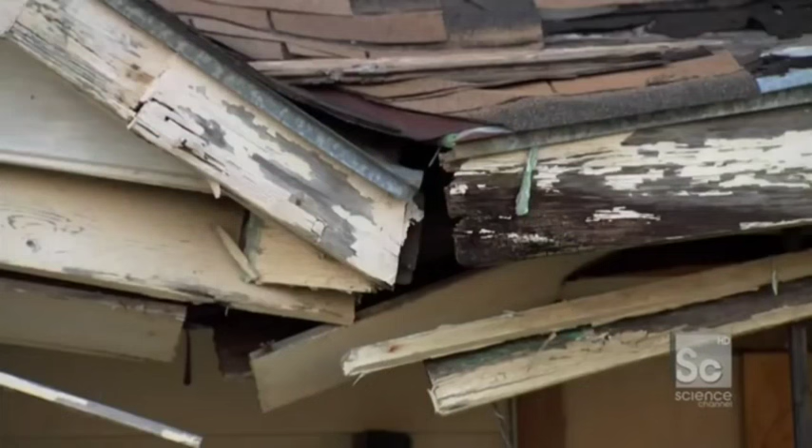It's been almost 5 years since Hurricane Katrina made landfall, and New Orleans is far from having recovered. Hurricane Katrina displaced more than 1 million residents, and since the event, less than half of New Orleans' population has come back. More than 80,000 homes remain unoccupied. The people of New Orleans are still living with the constant threat of another major storm. So this is still a city very much in crisis.

But New Orleans has a plan to ensure the city's safety for years to come and give people the confidence to come home. The federal government, the Army Corps of Engineers, and thousands of Americans are coming together to try and save this city. They're rebuilding New Orleans with hundreds of state-of-the-art, hurricane-resistant homes and a radical $14 billion storm protection system.

Prior to Katrina, this wall was the only line of defense that those residents had. It was the primary line of defense for hurricane storm surge. Tell me what's different now. What's different now is we've taken a step back and looked at the larger New Orleans area, and we've actually moved the primary hurricane defenses from this location to areas 8 miles away.

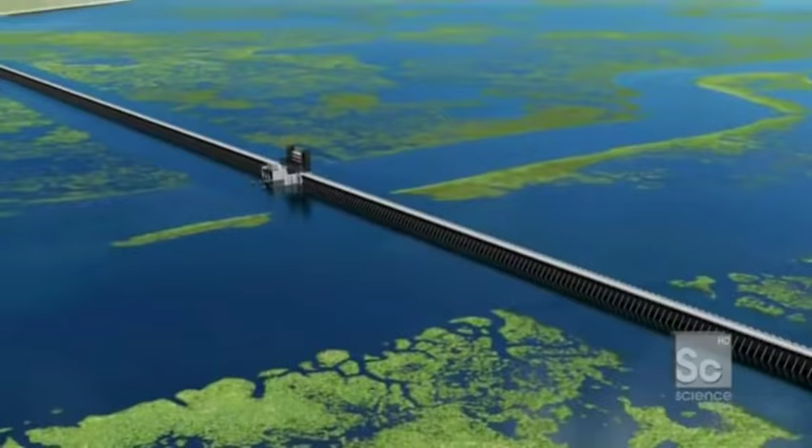8 miles from downtown New Orleans, they're building this: a 2-mile-long, over 150-foot-deep flood wall that is fundamentally changing how New Orleans will fight hurricanes. It's unlike anything ever built. The largest surge barrier in the world. Nicknamed the Great Wall of Louisiana. Designed to hold back over 44 million gallons of water from an oncoming storm.

Prior to Hurricane Katrina, stormwater flowed into New Orleans and was met by a 350-mile network of earthen embankments called levees. Located just 100 feet from people's homes, they held back the water, keeping the city dry. But when Katrina hit, the system was so overwhelmed by water, the levees broke in 50 places, flooding 80% of the city in just 5 hours' time.

To avoid this disaster happening again, the surge barrier is being built miles away from downtown New Orleans, where it can stop the water before it enters the city.

Instead of waiting for the storm to come to them, for the first time, they are taking the fight to the storm. Is this a new way to think about battling hurricanes? Nowhere in the world have we built a wall trying to keep out 25, 26 feet of water. No one's ever done it before. And this height here on a storm surge is unique. You gotta remember, the hurricanes that come to New Orleans are bigger, meaner, and there are more of them.

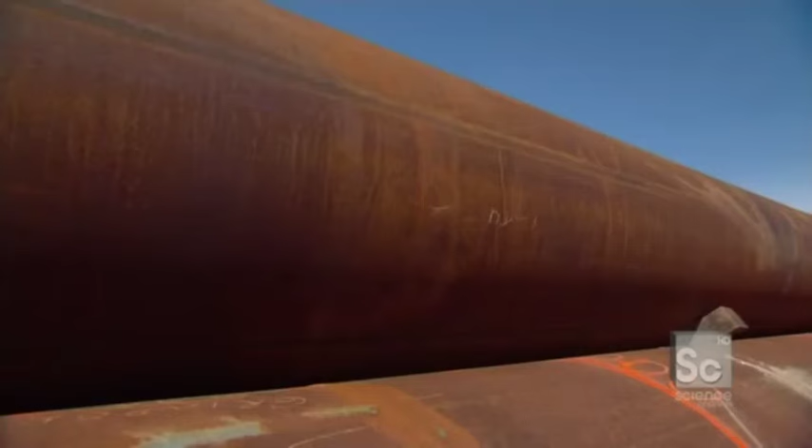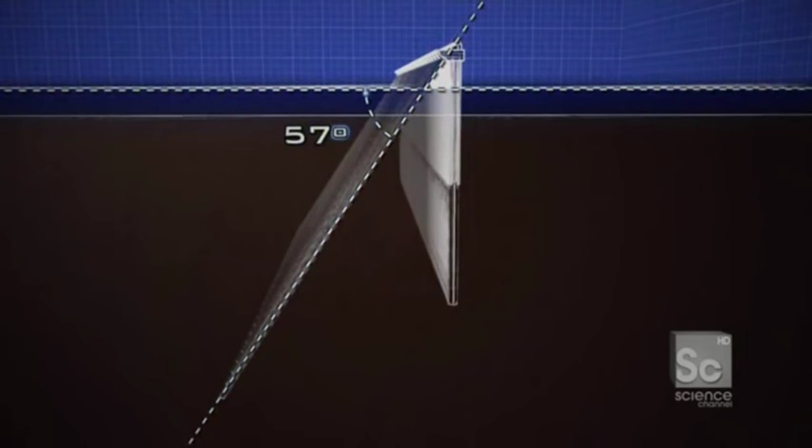To hold back a 26-foot wall of water, the barrier is fortified by 628 batter piles. When the storm surge hits the wall, what pushes back and keeps that wall upright and strong are these guys right here. They're called batter piles, and they're basically 288-foot-long steel tubes inserted into the back of the wall that support it and transfer all the loads of that storm surge into the foundation. Since there's no bedrock to hold the pile in place, over 80% of the wall is actually below the mudline. The deeper the pile is driven, the more friction there is to hold it in place. Each pile is almost as long as a football field and placed at an acute angle for added stability.

What'll be interesting about this lift is that this pile right here is horizontal, right? But in the end, we have to get this thing at a 57-degree angle to feed it into the machine called the leads. No one has ever attempted to drive piles this size at an angle before.

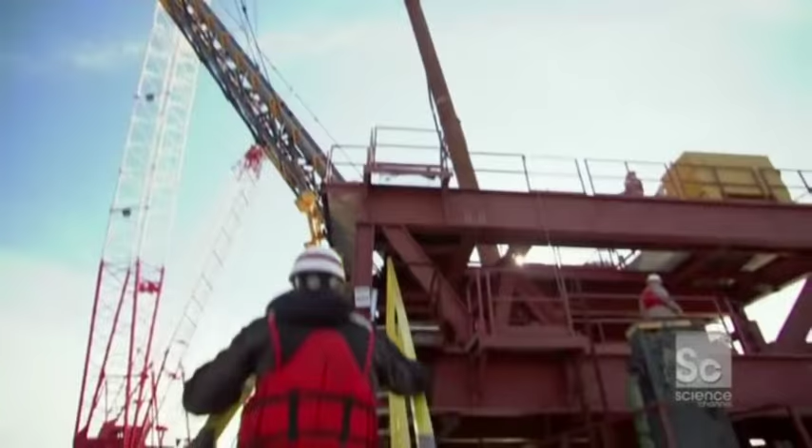To accomplish this engineering first, the Army Corps invented a massive 1,000-ton machine called the leads. Unlike traditional pile drivers that can only hammer vertically, the leads can hammer the piles at a precise 57-degree angle. And with 4 chutes, they can drive 4 piles in a row before moving on, saving almost 5 months of construction time.

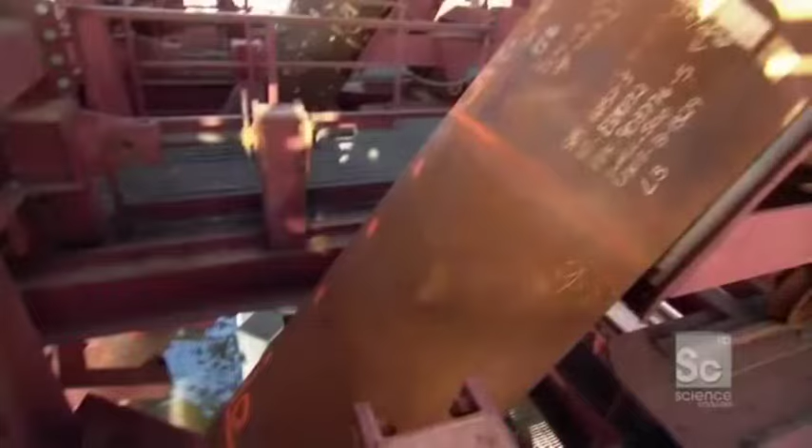So here it is, lowering it through the leads, right? The thing that's leading it right down this 57-degree angle, getting into position so we can start knocking this straight into the ground. Even the leads isn't big enough to handle a 300-foot-long pile in one go. So they're driven in 2 sections. The first section is 158 feet long and weighs more than 13 tons.

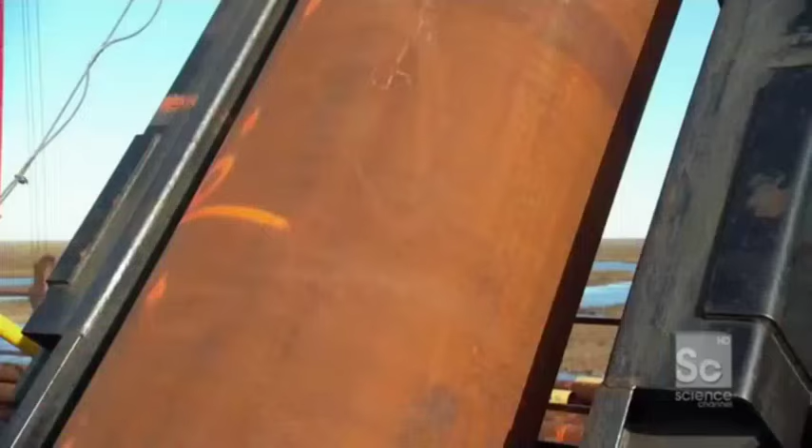So Mike, as I'm looking at this slowly creep down into the earth, this is just sliding into the soil below, right? Into the mud, yeah. I mean, there's really nothing down there, huh? Not much. I mean, it's soft. It's so soft that the pile sinks 38 feet in a matter of seconds under its own weight. After that, the friction from the mud becomes too great, so they have to use a hydraulic hammer. You want to run that hammer down? Absolutely. Time to drive the hammer.

So it's your job to control how much force this thing hits it, when it hits it, and how you drive the pile down. That's it.

So before the sun sets today, we're going to start smacking this thing and send it in? Right now, the next 2 minutes. If everybody's ready, got the earplugs on, let's go. Let's do it. I got earplugs. Come on, let's start smacking it. It's on auto.

So every time that smacks the pile, that pile gets pushed a little deeper into the ground. During the first 158 feet of driving, each blow moves the pile 10 inches. But as the pile goes deeper and friction increases, it takes 40 blows to move the pile that same distance.

So, Mike, the first piece is now in place. Right, and now they're going to bring over the second piece, which is that one right there.

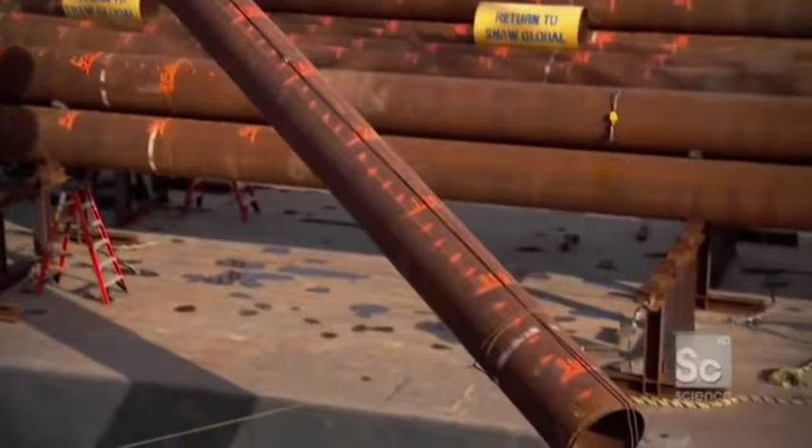Loading like a rocket launcher almost. They have to get the piece in, tamp it down, and line one end up with the next. Line it up, line it up! All right, so here it is, it's coming down. You can see we're basically going to fit this piece into that piece, have a little bit of an overlap, and that's what they're going to weld together.

So if you look right there, you can see the weld's been completed. Those two separate pieces have now been spliced into one, and now that pile is 245 feet long. The weld looks good. Yes, sir.

We're ready to drive it, put it on the ground. This is the last time we're going to see this pile in the air. So let's flip the hammer on and start smacking. Smacking it, are you ready? Yes, I'm ready, whenever you're ready. I'm ready. I was born to smack pile.

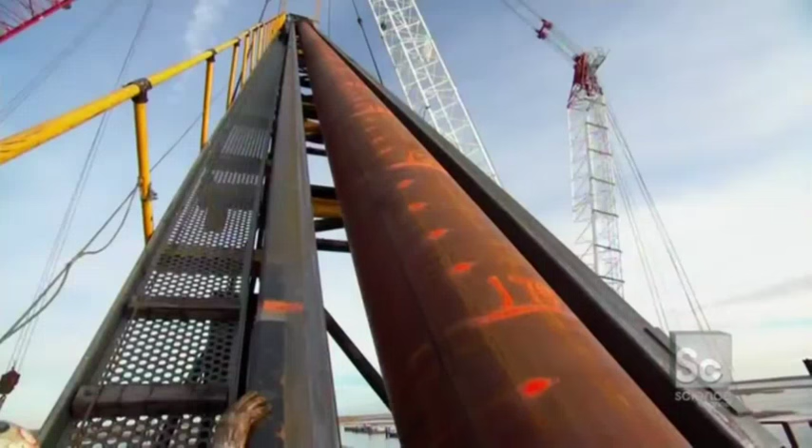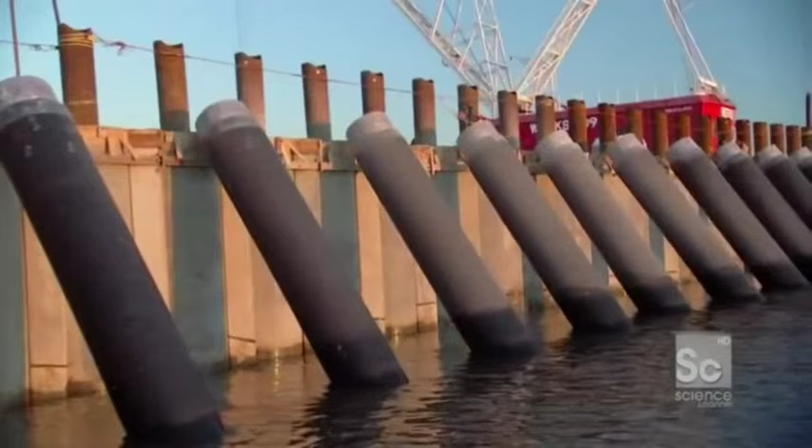It takes around 1,200 blows to get one batter pile into place. To stay on schedule, they need to install 628 of them in just 6 months, a total of about 750,000 blows. Normally, a project of this magnitude would take more than 17 years to complete. To make New Orleans safe as quickly as possible, the Army Corps is attempting to finish the surge barrier in just 3. To pull off this incredible feat, this crew has to work through hurricane season.

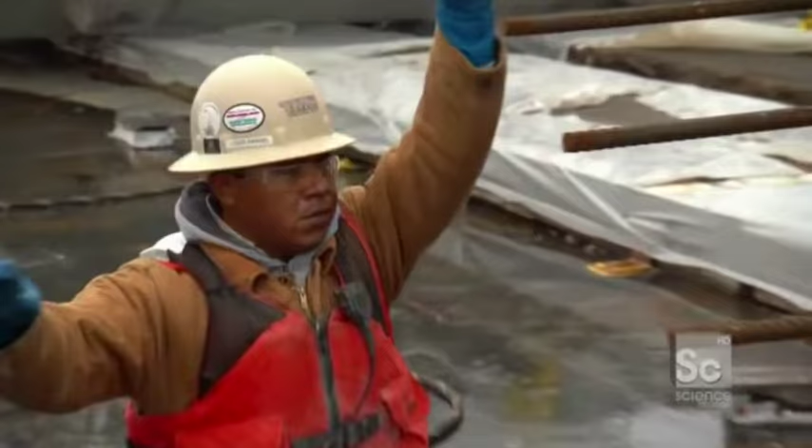So engineers came up with an innovative solution to get the job done right and done fast, even in rough waters. One of the biggest challenges when you're working in the middle of a lake is having a level surface on which to work, because barges move and tugboats pitch and roll as well. So in order to have a flat surface to accurately work, they developed that system right there called a trestle. It's a semi-permanent track that moves along with the wall construction. A trestle is basically a huge railroad track anchored into the lake bed, providing a stable workplace for large machinery.

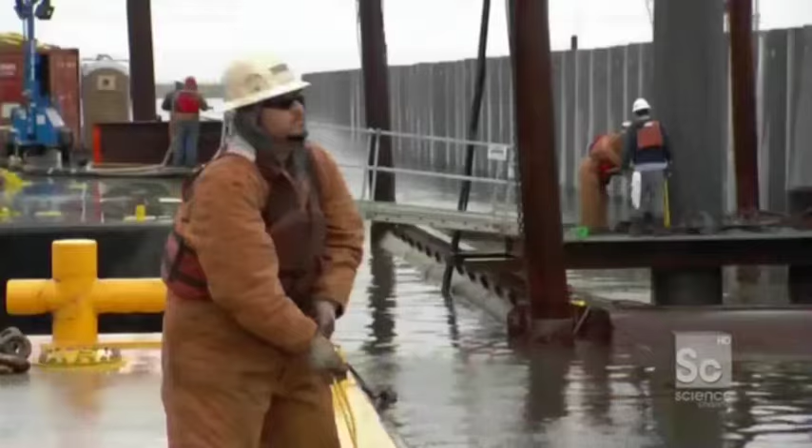The project has 1,000 feet of track for the entire 10,000-foot-long wall. So to keep construction moving forward, the trestle team has to leapfrog 50-foot sections from one end of the site to the other, up to 6 times a day. 50 feet of trestle track's about to go from this barge up in the air and extend our construction platform another 50 feet. Each trestle segment has to be aligned seamlessly with the existing track. The gap can be no more than 3 millimeters, or about the thickness of a shoelace.

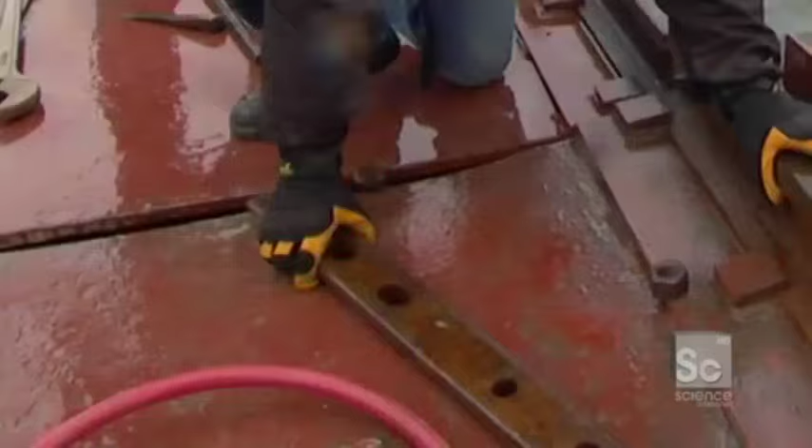Okay, so now that we have the trestle track, generally speaking, in place between the two beams, let's walk on the trestle. I'm standing on the pre-existing trestle track, and this right here is the new piece of track. As you can see, we have a big gap. We'll use this plate right here to put it on either side of the track, put the bolts in, and bind the track together.

6 bolts need to be in place to ensure a solid connection between the trestles. The issue is we have 5 out of the 6 bolts lined up, but one side is slightly higher than the other, so we're having a problem getting in the final bolt. The holes are about 3 millimeters off. In order to make that space to get it through, we're going to torch it out.

Would it not have made sense for me to move before he started? On the plus side, it's really cold and rainy. My right hand is much warmer than it was a minute ago.

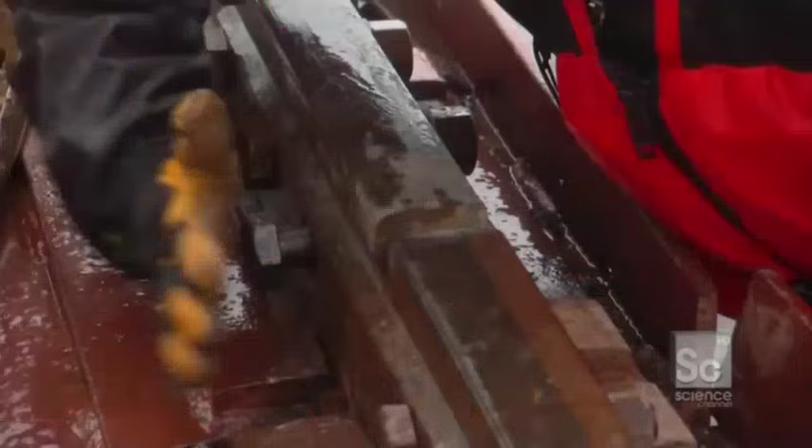After cutting, torching, and hitting, and some emotional consternation, the 6th and final bolt is through. This track has now been extended 50 more feet, and the construction site will extend. Can we go home? We finished now?

Up next, building new lives and new hope in the 9th Ward, with houses designed to fight back against the worst Mother Nature has to offer. These houses are being built to survive another Katrina.

When you think about what took place in New Orleans, you of course think about Hurricane Katrina. But the truth is, the actual damage wasn't from the hurricane, but rather from what it created, something called a storm surge. A storm surge is a wall of water pushed out in front of a hurricane by high winds and low pressure. During Katrina, it caused waters to rise more than 20 feet, overwhelming the existing hurricane protection and flooding almost the entire city. Katrina's storm surge was responsible for 90% of the destruction in New Orleans.

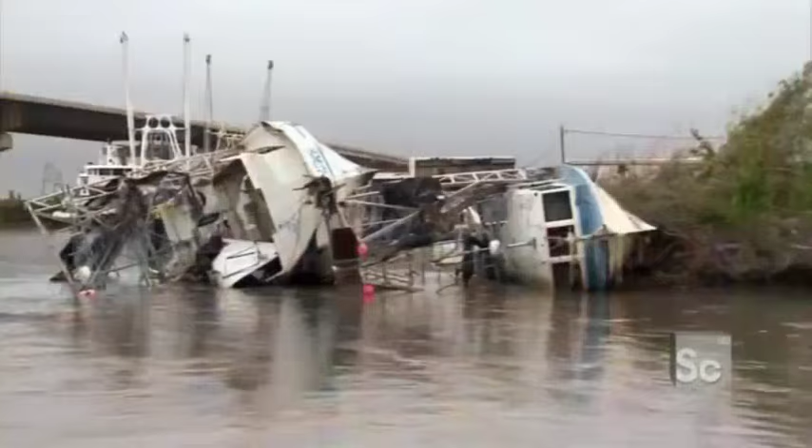Hardest hit was one of New Orleans' poorest neighborhoods, the lower Ninth Ward. I was actually here filming 5 years ago, right after the event, and it was harrowing. There were houses that were just blown clear off their foundations. Others were torn in two. I saw a house that was actually sitting in a tree. 5,000 homes were lost in this neighborhood alone, and less than 20% of its residents have come home to rebuild.

Hello? Hi, Miss Leggett? Yes. I'm Danny. Hi, pleased to meet you. Can I come in? Sure, I'm just about to get started on some sweet potato pies.

My timing was fantastic. Tell me what you saw when you first came back. You came here and you looked at it and you saw nothing. There was nothing here. A porch that my daddy built twice. That was it. And the tree.

Everything was gone. After all you went through, what made you want to come back to rebuild? I didn't ever want to leave in the first place. I ain't tell nobody I wanted to go nowhere. I didn't want to leave here. I was satisfied. This was home. Yeah, sure, this was home.

It's been 1 year since you've been back, and a very different house, a very different neighborhood, but does it still feel like home? Yes, getting there. It's getting there. We got cleaners now. We have different houses built up. More people are coming home. If you don't want to get this house, you can get another house. But as long as you come back is what we're looking for. Just come back.

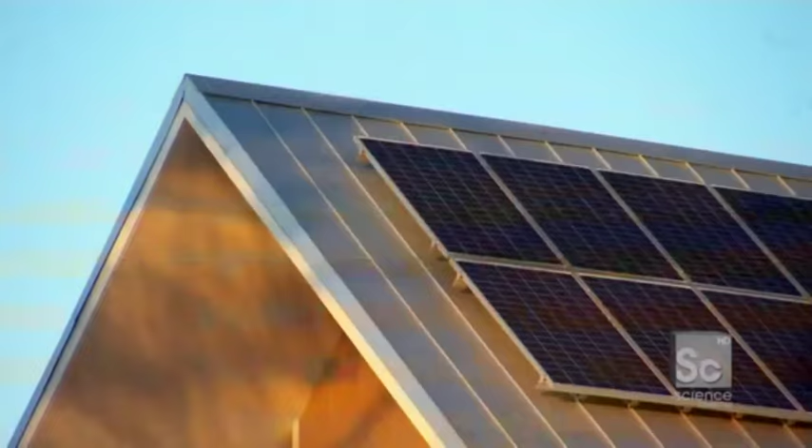To help people like Miss Leggett come home, actor Brad Pitt founded an organization called Make It Right. Their mission: build 150 cutting-edge homes, safer and more sustainable than ever before, starting in the most devastated neighborhood in New Orleans.

This is one of the areas that's hardest to build back because of the soils and because of the amount of displacement that occurred. We plant the seed in the toughest soil with some of the toughest situations in hopes of starting development all throughout New Orleans, but starting in the hardest area. It's incredible, an amazing project. No matter which aspect we look at, there's something incredible going on.

These homes are re-engineering the lower Ninth Ward and transforming it into one of the most hurricane-resistant neighborhoods on the planet. But one of their biggest challenges isn't wind and rain, it's the ground itself. Like most of New Orleans, the lower Ninth Ward is built below sea level, which basically means the ground below me is a big swamp. You build a house here, over time, it's gonna sink.

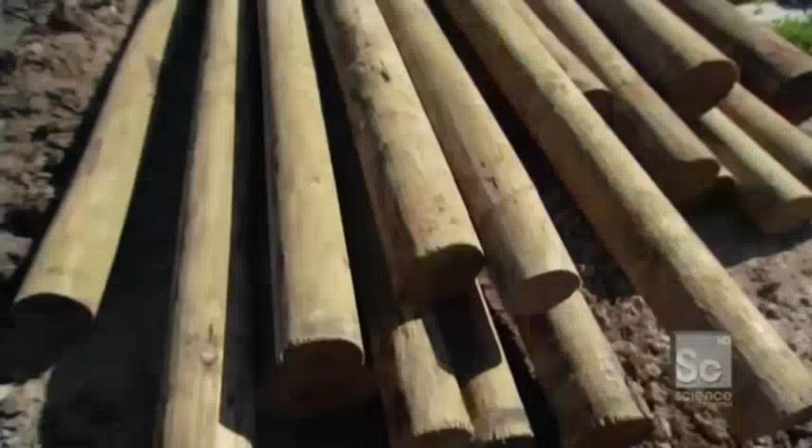So to prevent that, the Make It Right houses begin construction by driving these massive 40-foot-long piles into the earth. This is what they had before Katrina, and this is what they're getting right now. Right, exactly. So these are real, these are built to last. These houses are built to survive another Katrina. These piles are revolutionizing how homes are built in this flood-prone area.

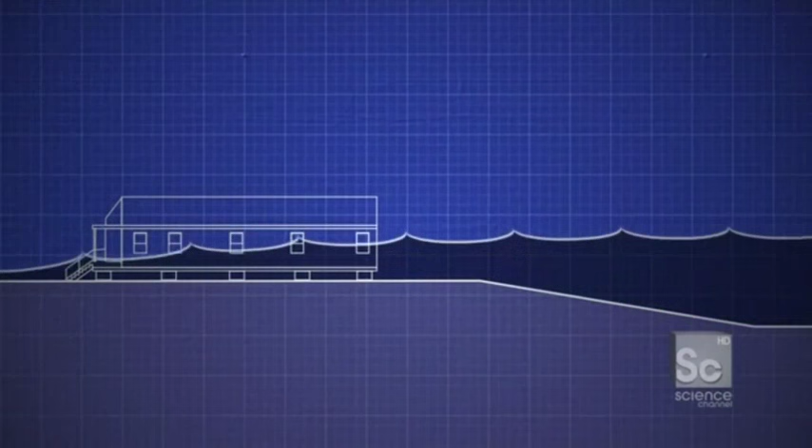Previously, homes rested on top of cinder blocks. When a flood came, the house would be lifted off the blocks and sent crashing through the neighborhood. But now, these wooden piles stabilize the soft soil so it can support a raised concrete foundation. It actually attaches to the house, strong enough to keep the home in place, even in floods more than 12 feet high.

Chris, how do you get a 40-foot pile rated to carry 7 tons into the swamp? You use that machine over there, which is called a sonic side grip vibratory driver that puts out 50 tons of centrifugal force, and it'll push that pile underground in about 2-3 minutes.

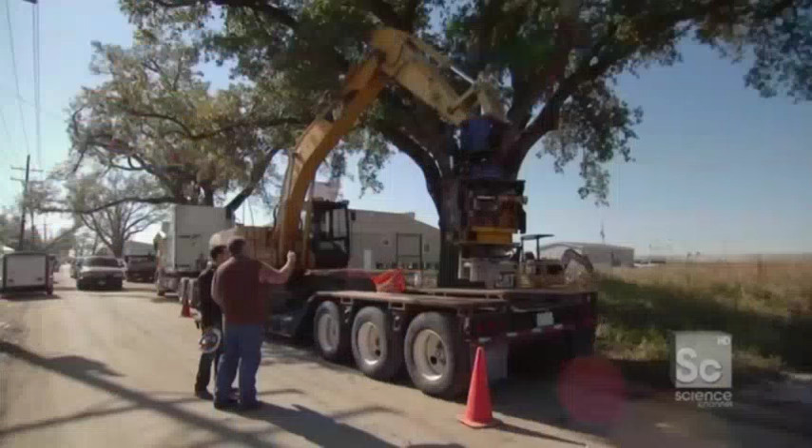So this is it, huh? This is the machine. It's like a construction action hero. My God. Tony, why don't you spin her around so we can look at her? This has got a kind of a Mad Max Beyond Thunderdome vibe to it, you know what I mean? Yeah, I never get tired of watching it work.

No one has ever used a pile driver like this to install foundations in the lower Ninth Ward. Its unique articulating arm can grab, lift, and drive the pile all in one shot. The work gets done 3 times faster than if they used a conventional pile driver. Grabs it by eye, swings it into place like it's his extended arm. Exactly. Puts it right down in a matter of moments.

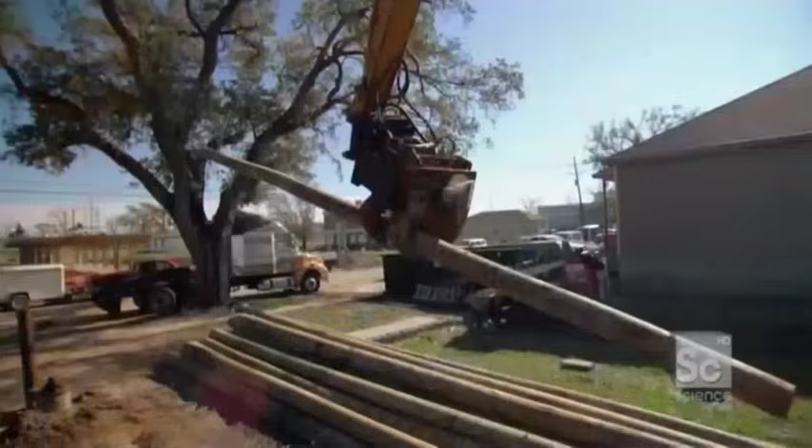Tony says the only place he really feels at peace is in that machine. You can kind of see that too, right? Yeah, oh yeah. To lift and move a pile requires careful coordination of 6 controls all at once.

That's good. Tony's located the pile right in the corner of the foundation. We have a little circle mark for him. And he's just gonna put this thing dead smack. Perfect.

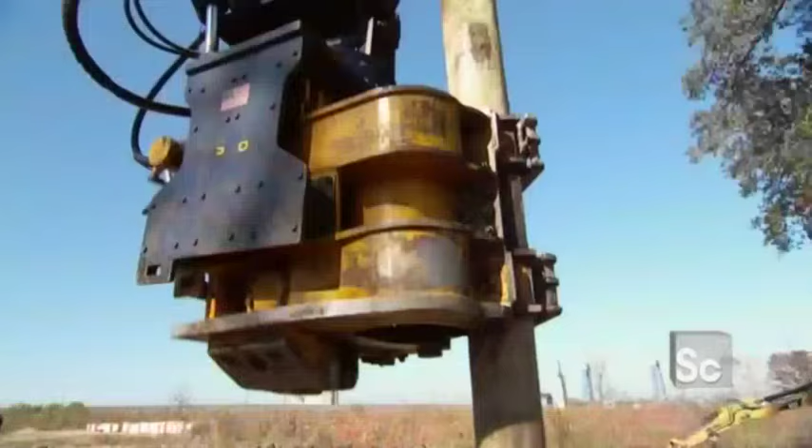It actually liquefies the soil around the pile, reducing friction and cutting the amount of pressure in half. You literally feel the ground shaking. Within like a 5-foot radius around Tony's workings, like my feet, my toes, my back, I'm itchy right now from the vibrations running through me.

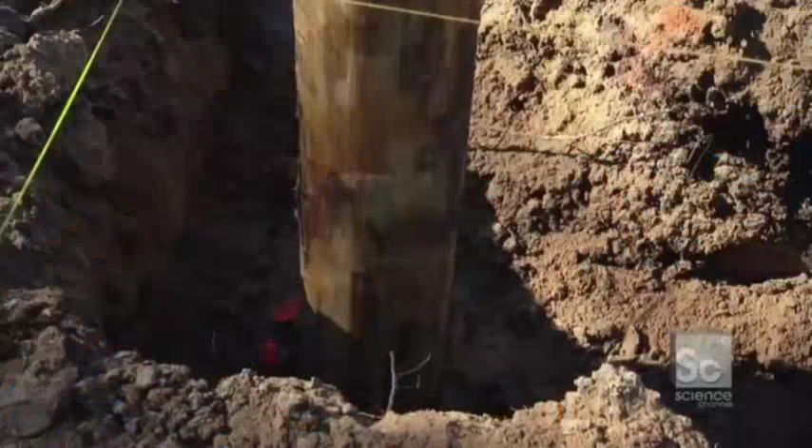So now what I'm standing on, even before the foundation gets here, is 40 feet of pile below me. And it's from this point the house now begins. Is it hard for a rookie? The hardest part's picking the pile up.

Let's give it a go. I'm gonna drop some piles. Okay, so you're Tony. Yes. I'm Danny. Nice to meet you, Dan. How you doing, man? I'm okay. We're gonna switch jobs. Yeah, you do the yelling and walking around and talking and not doing anything productive. Sounds like a winner. And I'll do the work. Sounds like a plan. All right, tell me.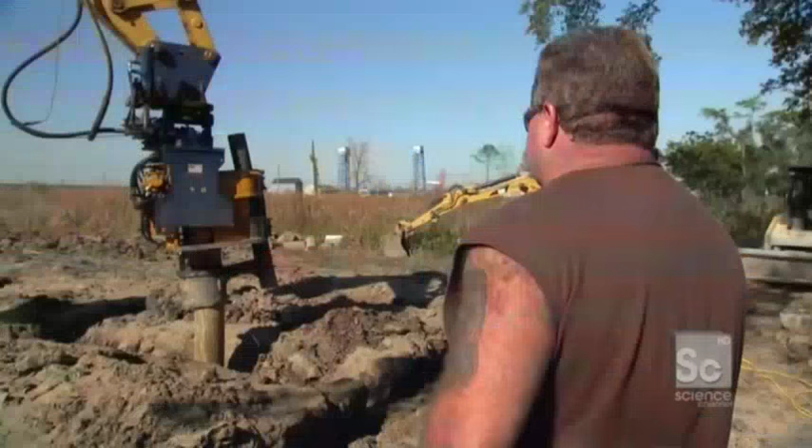Can't beat that. How's she looking? First time out, that's not too bad.

Now tell me something, you're from here, right? Born and raised here, born and raised. Yes. So regardless of the next event, next storm, if it happens again, you come back. We're coming back, this is home. This is life, this is reality here. I come here sometime with my kids just to show them the houses, you know. This is what we doing. We bringing people home. It's good stuff, man. No, it really is. It's amazing.

Up next, putting together the strongest wall ever built. And we're gonna literally thread the needle in some of the worst soil conditions in the world.

Since it was founded in 1718, New Orleans is a town that's been working against the elements, primarily because 50% of this place is located below sea level. But for the first time, New Orleanians are trying something new, working with nature instead of against it. New Orleans is built on top of a giant marshland, which for millions of years naturally absorbed thousands of gallons of rain and floodwater.

Today, most of that spongy marsh is covered by pavement, causing significant problems for this flood-prone city. In a typical situation, when it rains, what happens to that water? How does New Orleans deal with it?

That water runs off, goes to our curb and gutter, goes about 8 blocks north of us, and is pumped over a levee at about 2 cents a gallon. That's expensive, it's time-consuming, it's a problem if the pumps fail. It's not sustainable. Frankly, relying on the pump station, relying on the city hasn't always worked so well for these citizens.

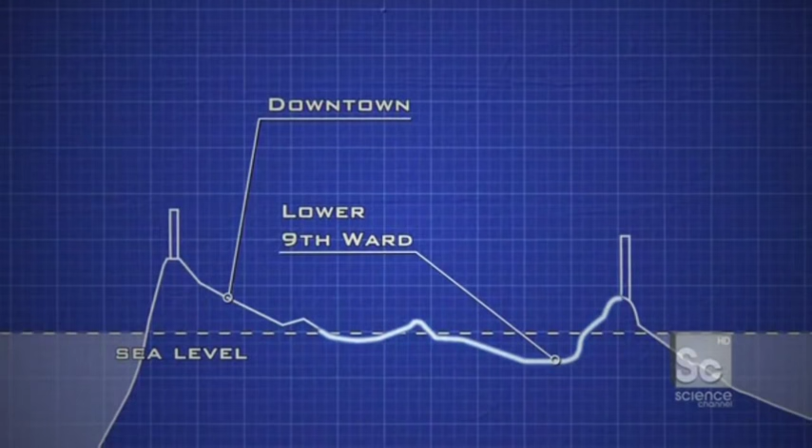Over half of New Orleans is located below sea level. This paved city is basically a big bowl. When water comes in, the only way to get it out is with pumps. So when the pumps failed during Katrina, the lower 9th Ward was left underwater for more than 3 weeks.

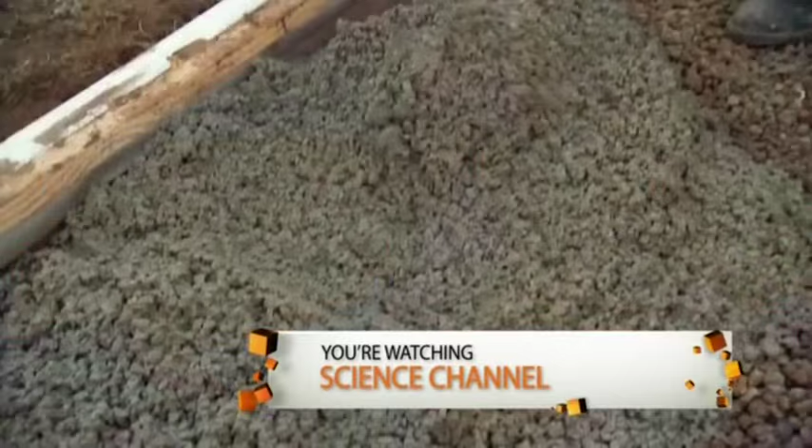We're in a situation where our community has a real fear of water, and it's a valid fear of water. So the folks in this neighborhood have a different mindset on water, and we're trying to change that paradigm. To make sure this neighborhood is not left underwater again, engineers have found an innovative solution to radically reduce the need for pump stations, called pervious concrete.

As water runs off of our site, it does the opposite of what typical pavement does. Instead of a giant table that tilts water and flows it to the curb and gutter, this is a giant sponge that accepts rainwater, stores it in the concrete and below, and doesn't hit the curb and gutter and run off our streets. So you're telling me this driveway and this sidewalk, when rain hits it, it's actually going to absorb that water? Correct. Unlike conventional concrete that repels water into the storm sewer, pervious concrete absorbs it.

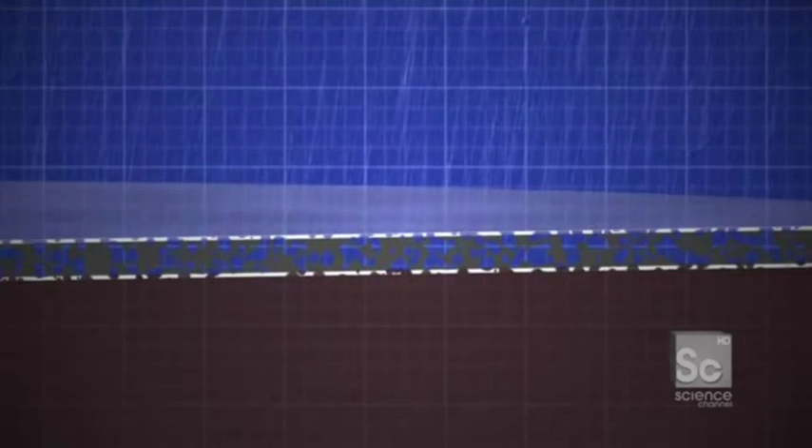Filled with tiny air pockets, it allows water to flow through it and into the native marshland below, where hundreds of thousands of gallons can be stored naturally. Do you have any actual finished stuff that we can see?

Yeah, we have a little mock-up right here. It actually does look like a Rice Krispie treat. Rice Krispie treat. Look at that.

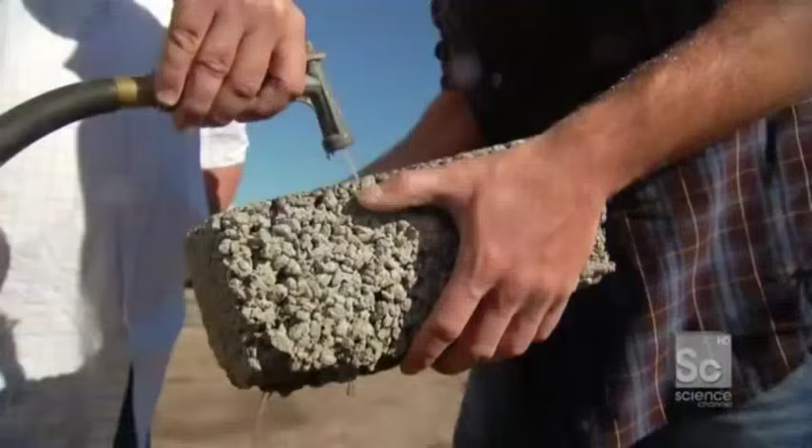All right, let's simulate right now. I'm a driveway, you're a rainstorm, and the rain's coming in. It just stores up, it's just eating it like a sponge. And then it comes out the bottom. Look at that. Now, typically, all that rain we just dumped down would go from this driveway into the sewer system and have to get pumped out.

Correct. At ultimate build out, we will be saving several hundred thousand gallons of water hitting the storm sewer every rain event. And that all starts with you, me, and a bunch of guys pouring some concrete. Absolutely. Here it comes.

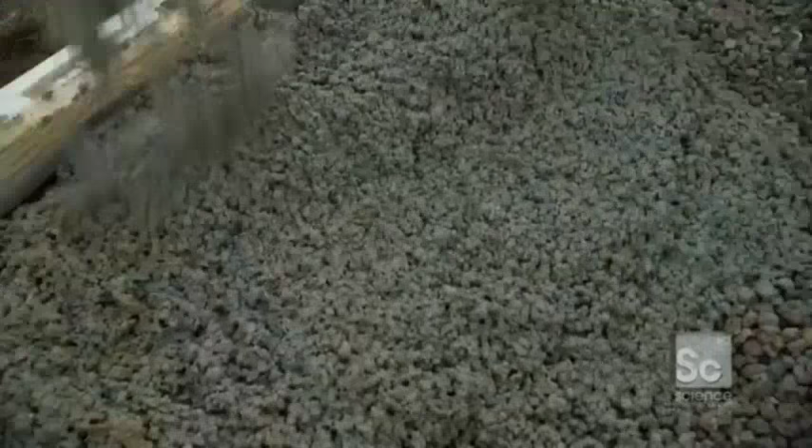It doesn't look normal, right? It's much drier, thicker, and chunkier. Because of this consistency, pervious concrete pours much slower than conventional concrete and dries much faster.

So we have just 15 minutes before the concrete sets. So we're actually trying to push the concrete out, but then actually compact it. Yeah, we're gonna compact it. We're gonna pour it 3/4 of an inch higher.

Got it. What I'm doing right now is sort of the opposite of what you do with normal concrete. Typically, you vibrate concrete to get the air bubbles out. Here, we actually compact it tight to get lots of air bubbles inside of it. That's how the water goes through it.

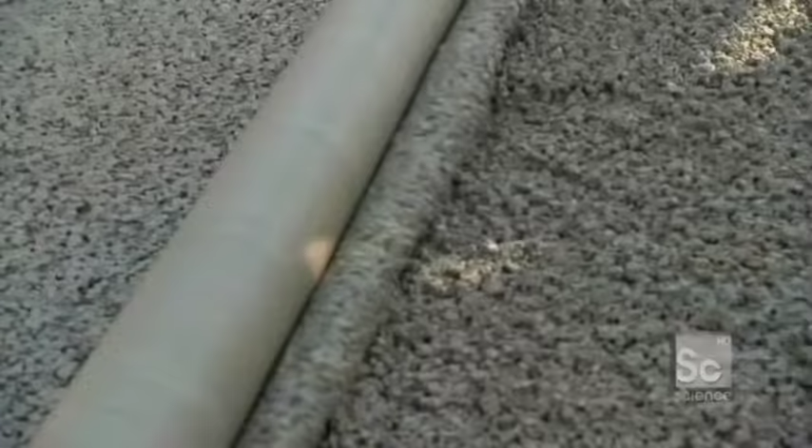Compacting the concrete is the most critical part of the process. If it's compacted too tight, it won't absorb the excess water. Too loose, and it'll crumble.

To do the job quickly, they use a specialized 150-pound roller called a screed. Ready? You wanna pull it? Yeah, now I'm pulling it. All right, come to me, here we go. Stay with me, here we go, nice and slow.

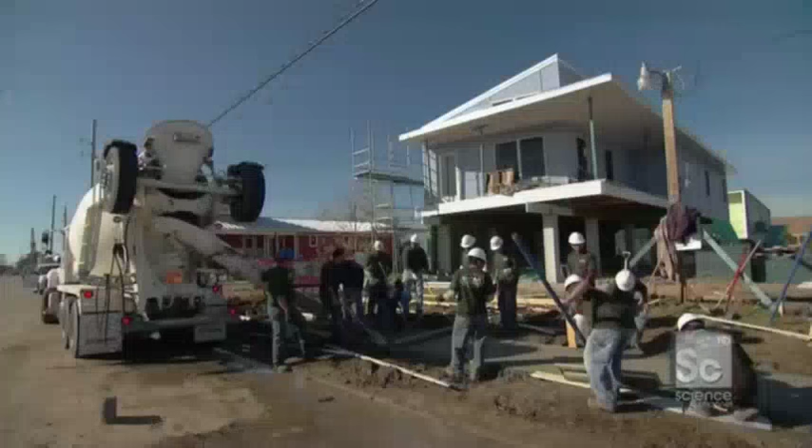I'm making pervious concrete, you know why? Because I don't want concrete to push water in the sewer system, do you? No, you don't. Good job, good job.

That was perfect. Beautiful. And although it may not look like it, this is actually the finishing touch. This is the layer of concrete that you'll see every time you walk down the Make It Right streets. Big, hard, dense Rice Krispie treat that all the while is sucking up the water and making sure it does not go into the streets. I love it, man.

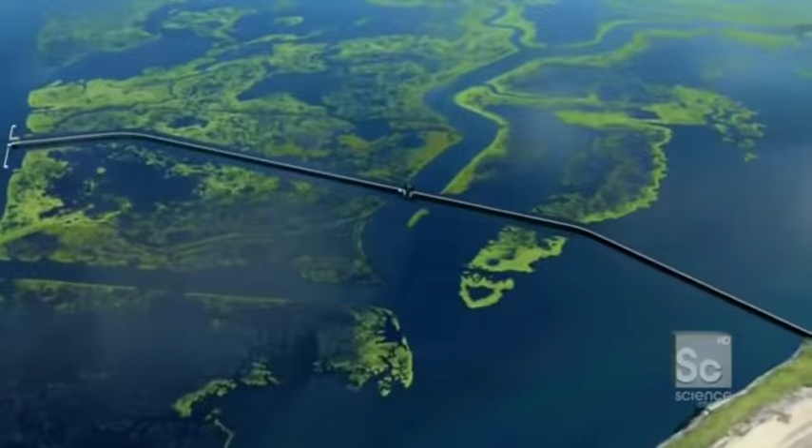The concrete will absorb 5 gallons per hour, using Louisiana's natural marshland to keep the neighborhood dry. That same absorbent soil, however, is the biggest problem for engineers building a 2-mile-long surge barrier.

What's fascinating is that you want this wall to be strong and heavy and beefy, but if it's too heavy, the soil is so weak your wall will start sinking. That's one of our challenges: we need a very strong wall, but also a light wall comparatively speaking for concrete. We can't build a Great Wall of China here because the massive weight would simply sink out of sight. Instead of one solid structure like most levees or dikes, engineers designed the New Orleans surge barrier as an A-frame.

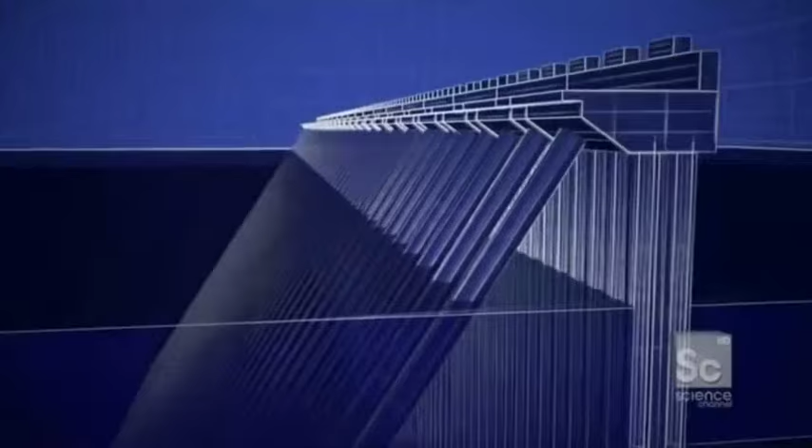It uses half the material but is actually stronger than a solid structure. The key to its strength: 330 concrete caps placed at the top of the A. They link the vertical piles to the batter piles, directing the force of the storm from the front of the wall, through the batter piles, and down into the marsh, dispersing the loads and keeping the wall strong but light.

When the soldier piles and batter piles are in place, what ties them all together and makes them one structural system are these caps. Your chain is as strong as your weakest link, and this is the link essentially - what connects the two types of piles. This 96-ton piece of concrete, very high-tech design, transfers that energy.

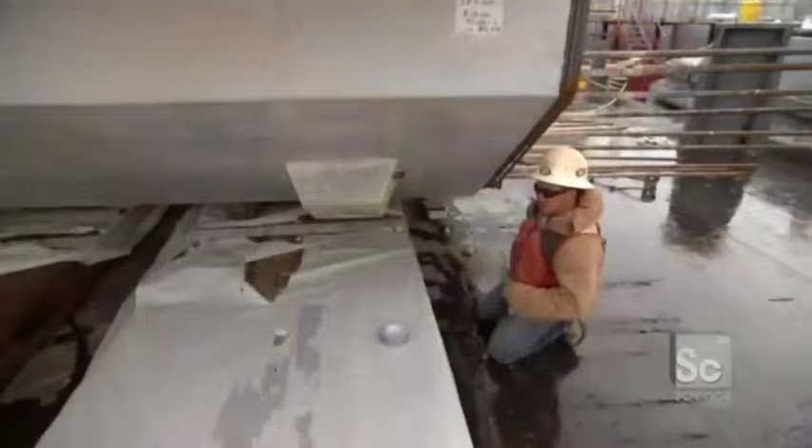Before the cap can be lifted, each joint has to be reinforced with a waterproof seal installed between the cap and the piles. This is the seal, like a gasket, to hold the concrete on and keep it tight - to make sure the batter pile meets the cap and you get one tight joint.

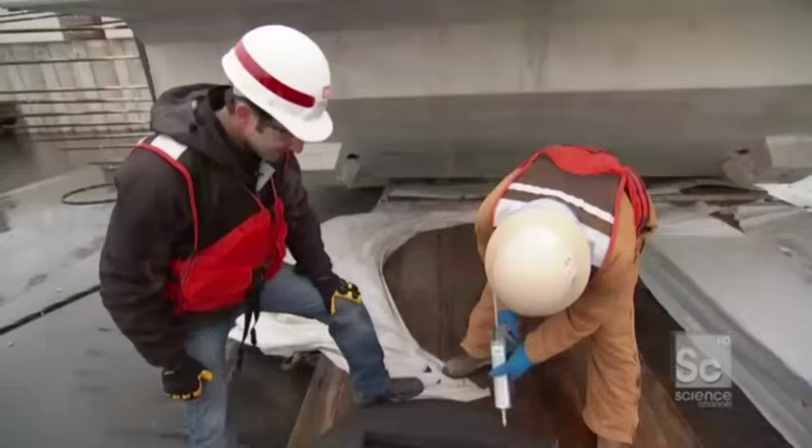The seal between the cap and the batter pile is created by the weight of the 96-ton cap.

Luis, aka Jackson Pollock of the glue.

Luis uses construction glue to hold the seal in position while the cap is lifted up onto the wall. All right, Luis, let's pop it on.

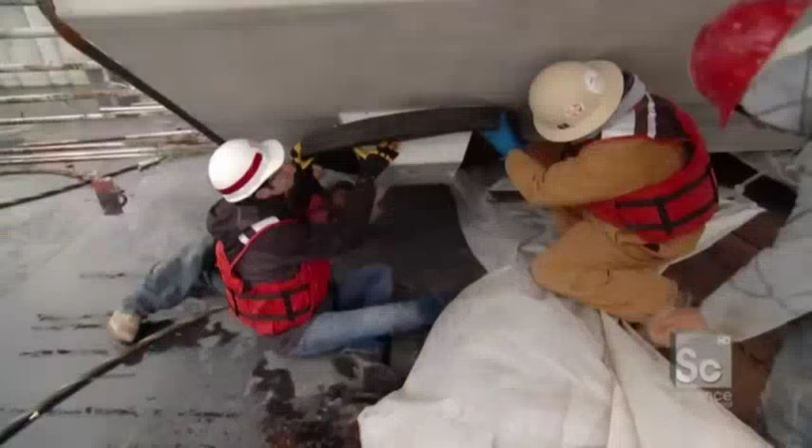96 tons, holding back 200 billion gallons of water - and during construction, duct tape.

How's she looking, Luis? Looks pretty good. Pretty good? Yeah, looks good. Very good? Very good, I say.

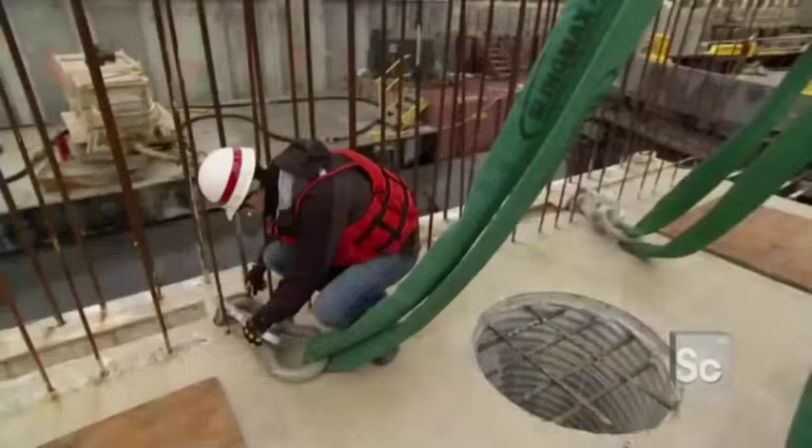Okay, that's it, our four shackles are attached. This now 96-ton cap piece is about to get lifted up from this barge and placed atop the flood wall. The 300-ton crane is located on a barge, causing the cap to bob and swing during the lift, making precise alignment a real challenge.

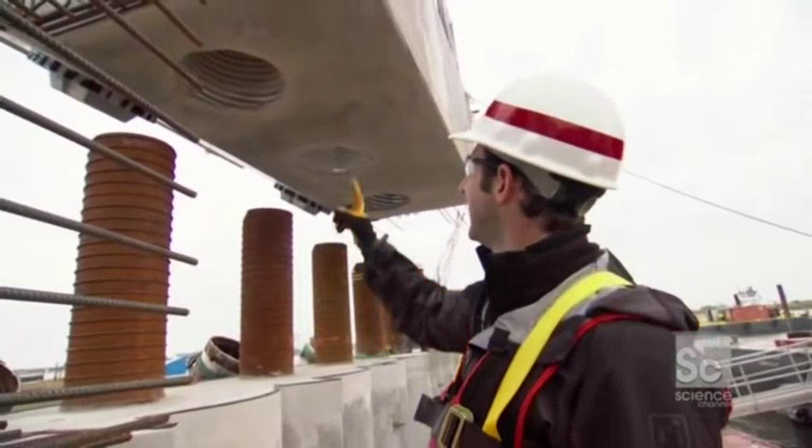We're going to literally thread the needle, taking these 3 shear pins which extend the soldier piles and put them right into the cap, fusing them into one. Once in place, the cap transforms the wall from 5 separate elements into one structural unit for the first time.

Even as it comes down a few inches, 96 tons or otherwise, a little bit of motion can still move the thing. So we're shifting over just a couple millimeters.

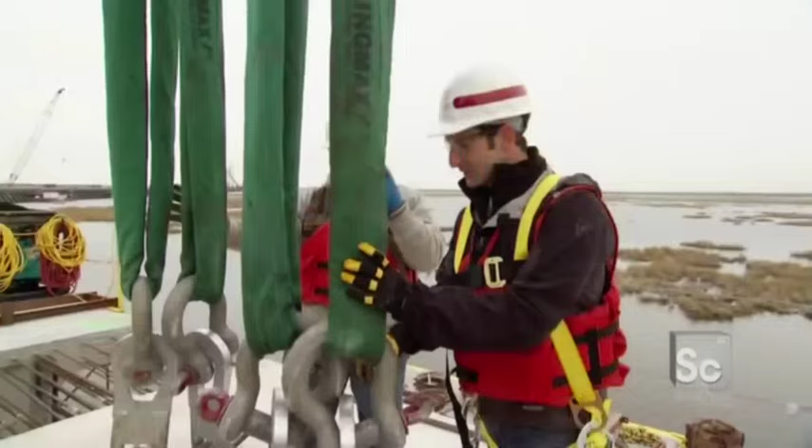As you can see, the cranes are detached, sending the shackles home. This is in its final location, 96 tons lined up within millimeters. One down, move on to the next one. Up next, we're going - come to Papa.

Racing to fuse the wall together with one of the fastest concrete assembly lines ever designed. You can open it on up now.

But first, what wind speed can the new Make It Right houses in the Lower Ninth Ward safely withstand? The answer after the break.

The answer to our trivia question: the Make It Right houses can safely withstand 200 miles per hour winds, enough to survive a Category 5 hurricane.

Given the amount of investment going into saving this city, sometimes the question is asked: should we save New Orleans? But it's important to point out this is more than just Mardi Gras. New Orleans represents a quarter of all domestic oil production for America. The Port of New Orleans is one of the most important ports we have, the very gateway for all shipping traffic to the Midwest. This port is so important it's been defended for more than 200 years.

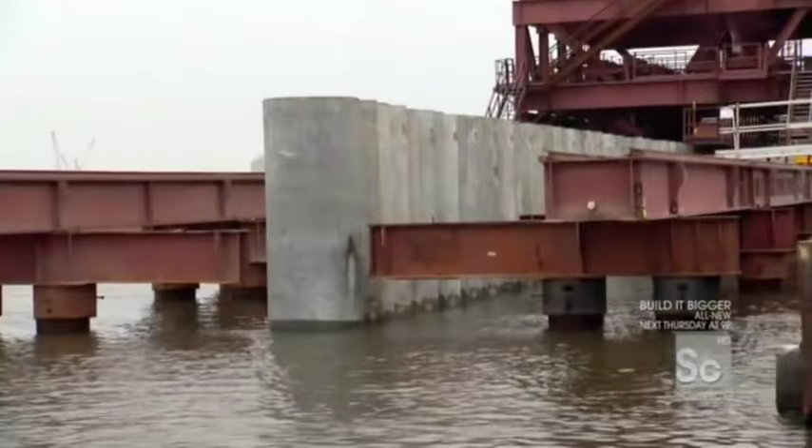The surge barrier is designed to continue protecting the port and the 2 million people in and around New Orleans for years to come. We're constructing a wall here which we know is pretty robust - several hundred years from now, this structure will still be here because nobody's going to take it out anytime soon. So the reality is this will provide viable surge protection for the city of New Orleans for a long time to come.

This massive wall is engineered to last for 100 years, but they have to build it in just 18 months. And you guys have basically designed a system for speed. Yes, for speed, big time. Engineers, they've been thinking about this for a long time. We're just making it work.

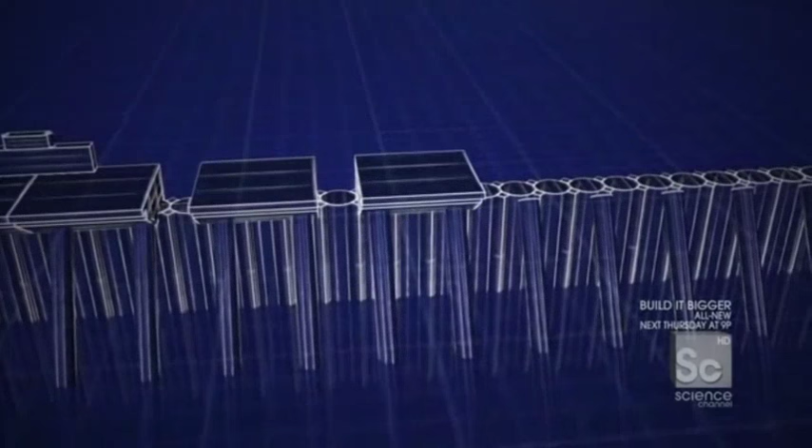To save time, they're using an assembly line. First, a crane drops in prefabricated concrete caps, leaving a 6-foot gap between them, not wasting time lining them up. Then behind them, another crew fuses the caps together with poured concrete, smoothing out any misalignments. This system shaves off more than 6 months.

So essentially, rather than have to worry about fussing and getting it just right with millimeter tolerance on site, they just keep moving. Because even if he's a little bit off, misses the mark a little bit, Rusty comes in, just fixes it up. That's it. Gets like Legos with a little bit of silly putty in the middle. Right? Yeah, you got it.

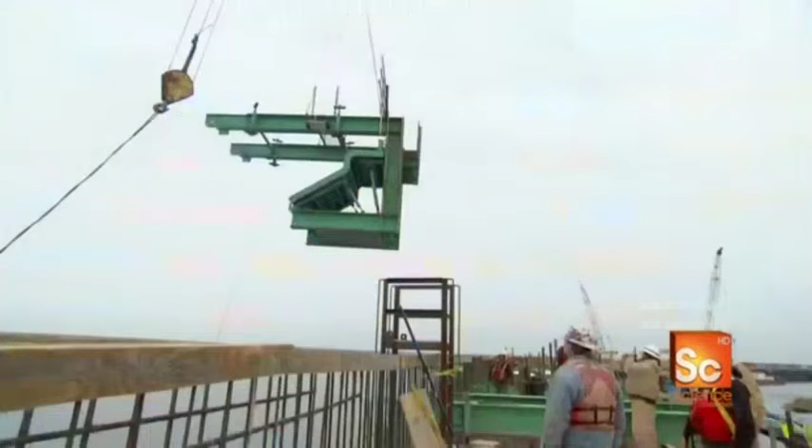To fill the space in between the caps, they pour the concrete into custom formwork. What we're looking at right here is essentially a 10,000-pound mold, a shape that we're going to bring into place, which is shaped exactly like the precast caps. Put it in place, and bring 2 precast caps, form together as one.

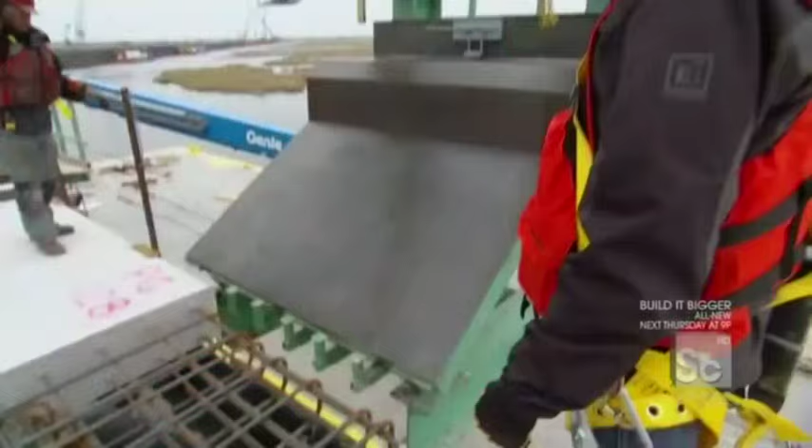Cabling on down a little bit. I've got our hands on it, hold that. A little bit of right swing, down easy. 6 more inches, a little bit. I hold that. Another shot of boom up now, booming up. You done this before? A few times.

The formwork snaps into place with alignment pins, matching up perfectly with the 2 caps on either side. This snug fit allows the poured concrete to smooth out any minor errors in the placement of the cap.

Okay, Rusty, so when I got here about 15 minutes ago, there was a big gap in between these 2 pieces of precast. Big hole. Form is now on, both of them. Done incredibly quickly. Yes. Tighten up the bolts, put in the pins, and then pour some concrete.

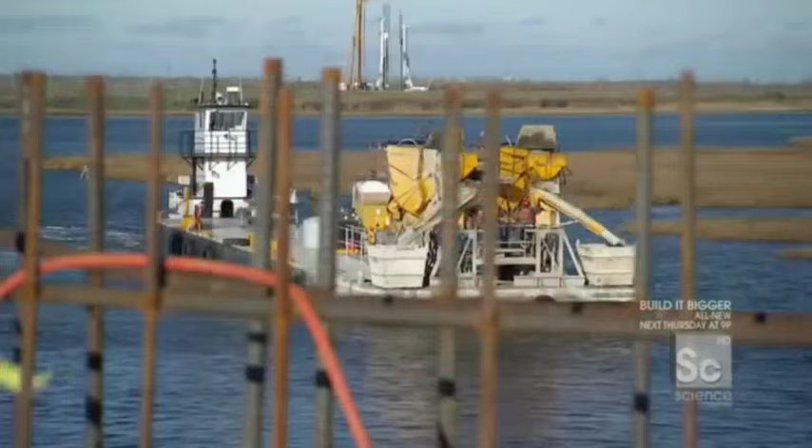The team now needs 36 tons of concrete to fill the gap. But they've got to transport it from the concrete plant 2 miles away to the construction site in the middle of Lake Borgne, all before it starts to dry.

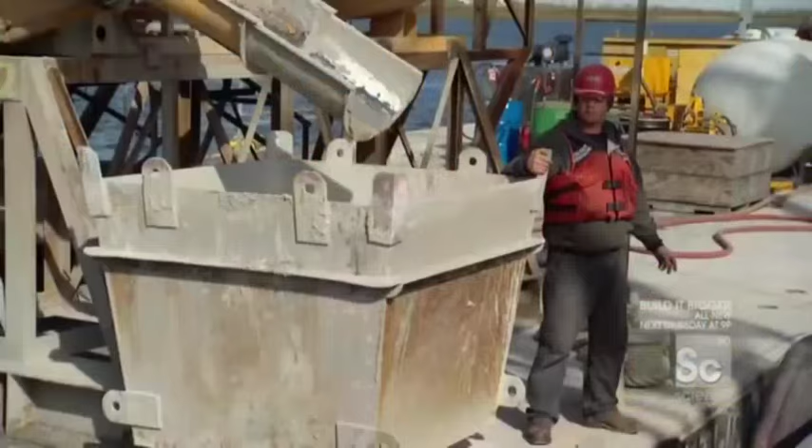There it is, coming around the corner right now. So here's the concrete. It takes about 15 minutes from where we're at right here to get to the dock. And then naturally it takes them about 10 minutes to load and then 15 minutes back out. Since they're losing about a half an hour in transit, Rusty's team now has a narrow 60-minute window to pour the concrete before it cures.

We're going right now. Come to Papa. To fill the gap, they have to lift 9 bucket loads in under an hour. You can open it on up now. Open it on up. That's it. Let's go get another one. That's it, we just keep going.

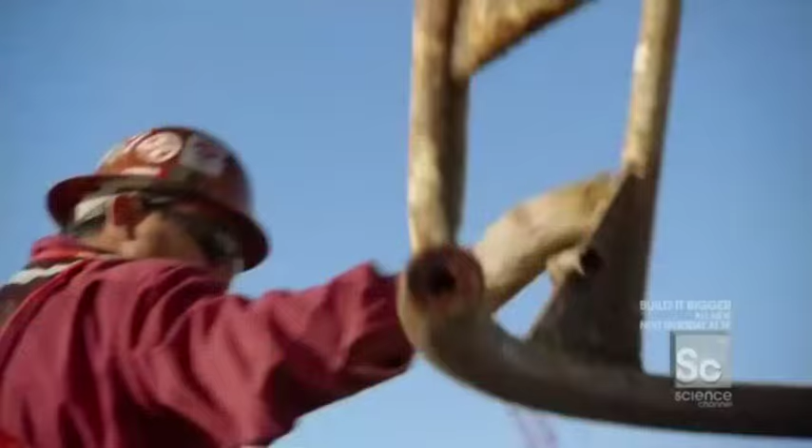Well, there it is. As fast as she came, she went, 2 yards of concrete in the hole, down the chute, and in the space. 2 yards go out, 2 more yards are coming in. It just goes fast. Coming on down. Here it comes.

Once the gap is filled, it'll dry in 2 days. Doing good at it, man. Doing good. Permanently fusing the caps into one monolithic concrete structure.

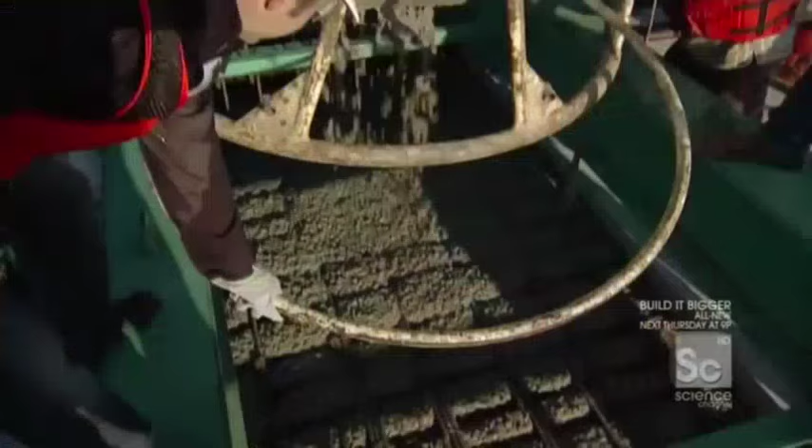Whole thing took us, what, 15 minutes? Probably 15, 20 minutes. When you're doing a job like this, pouring this concrete, it's not hard to remember why you're doing it. Everybody out here enjoys coming out here. But we are building it for a reason and for a cause. Like I say, to save people's lives, property, all that.

You get a sense that this thing is done right, this wall gets done in time, this city can start to come back? Oh, yes. I believe that 100%.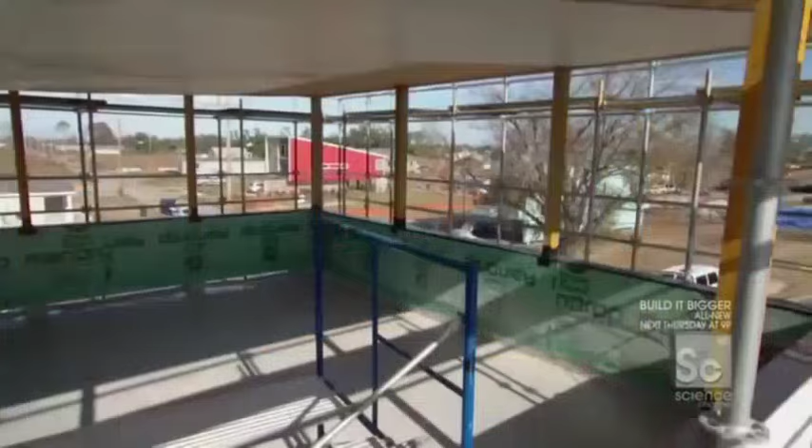This innovative concrete assembly line is giving New Orleans a barrier that will act as the primary line of defense. And on a smaller scale, another revolutionary type of concrete is being used as a second line of defense to design homes 3 times stronger than normal. The design of the Make It Right houses is to survive a hurricane, but it's also to last the test of time. So instead of wrapping them in traditional wood siding, which rots over time, they're trying something new. They're wrapping these houses in cement.

They're using something called HardieBoard, a cutting-edge siding made of compressed cement designed to last over 50 years. So what do we have in this environment that bangs up the siding so badly? A lot of rain, humidity, storms. You're in the Gulf South, a lot of moisture. So the outside of these houses are kind of getting slaughtered.

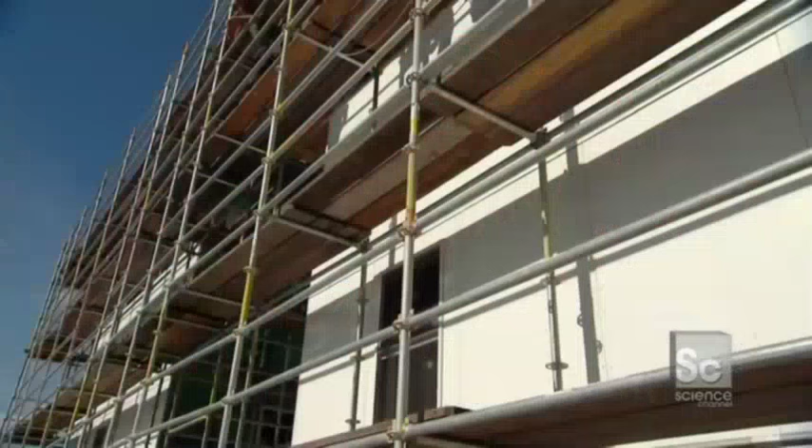Absolutely. And what's different about this cement board? It will not rot away. This siding is made of an innovative compound that does not mold or rot when wet. Unlike traditional houses that have to be demolished after a flood, this house will simply dry out in the sun.

But in order to do its job, siding has to stay on the house, even in Category 5 winds. During a hurricane or any strong storm event, there's that suction where they actually pull the skin off the building. If that corner was to come off during high wind, it would take that sheet, and probably that sheet, and keep on going.

They've calculated the position of every nail to ensure the siding is windproof. There is something tank-like about taking a house, wrapping it in a kind of thin cement frame, and keeping your nail patterns hard like rivets. Absolutely, like armor plating. This house is going to be here for a long time.

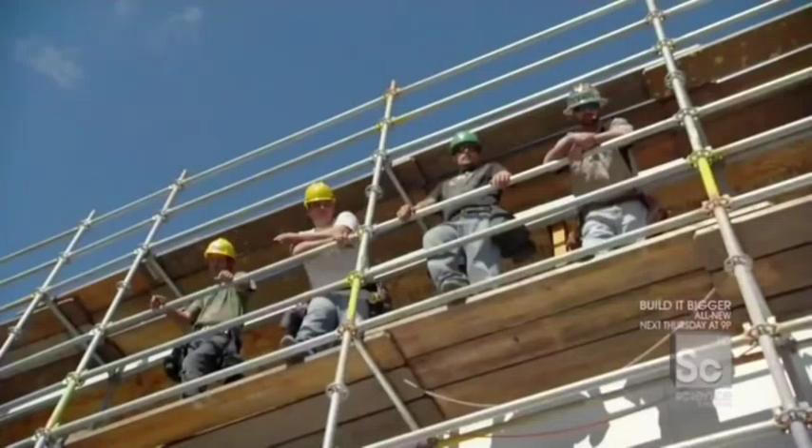So how do we install the cement fiberboard? We got some guys up top getting ready to install some right now. It's only half an inch thick, but this 4x8 piece weighs almost 80 pounds, twice the amount of traditional wood siding. There it goes. Cement board to the sky.

So I'm now standing at the 3rd floor of the house, and what you're looking into is actually an outdoor covered deck. And it's on this underside of this covered area we're going to apply this board.

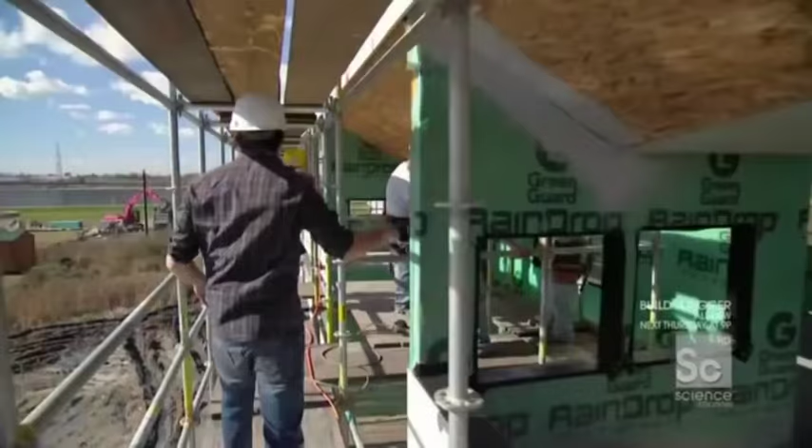All right, fellas, how you doing? Watch your feet. So you're from Louisiana? New Orleans. An amazing place, nice weather, sick architecture. Oh, and heavy cement board.

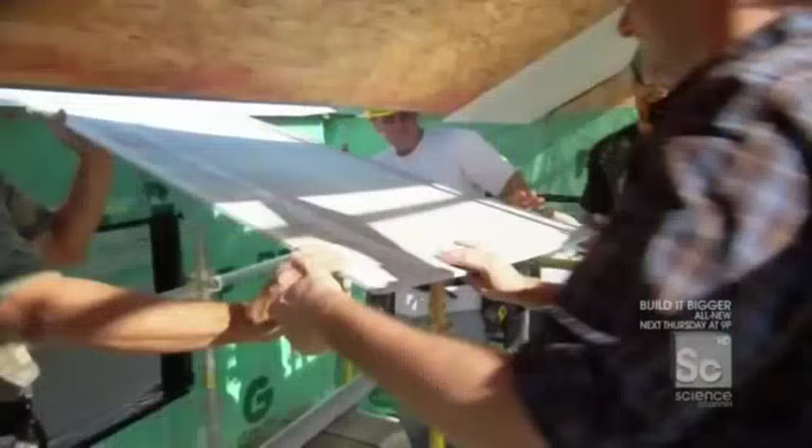Yeah, we're just going to kind of roll it over. It takes 6 people to position this single panel. All the way over? Yep. It has to be perfectly flush with the previous board in order to form a windproof seal.

Nope, a little higher. Come on up. There we are. Who's got a nail gun? Right behind you. Far side over here. Up top? Yep. That is on pretty damn tight. And that's it. Look at that.

That quickly, about 8 feet of siding, the very outside of the house, what will keep rain out of this thing, keep it dry, and lasting 50 years. Isn't that right, Troy? 50 years. Once they put paint on there, she'll last a while.

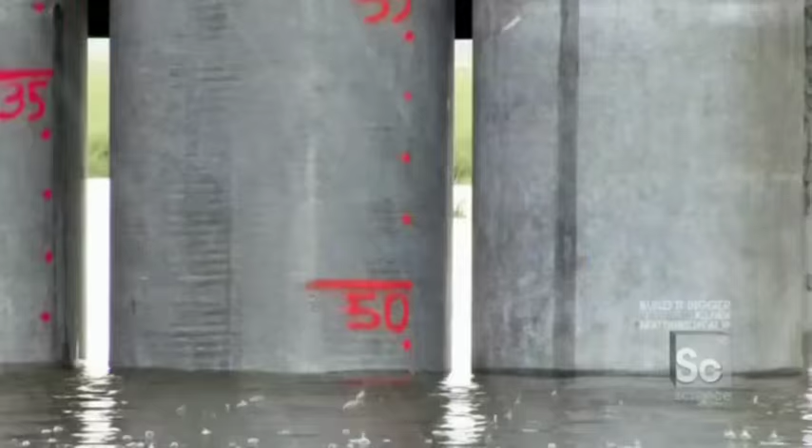New Orleans' new 2-mile-long surge barrier will give residents much-needed hurricane security. But it's difficult to rebuild with confidence until it's done. With the next hurricane season just 9 months away, this construction team is working around the clock to finish in time. Well, it's about 8 p.m. The sun is set, the moon is out, and I'm going to work right now. Given this non-negotiable deadline of finishing this wall before hurricane season 2011, the guys are not just working 7 days a week, but also 20 hours a day.

Rick, Max. Yeah. Father, son. Formwork crew. Yes. What is it, the graveyard shift? Just about, yes, sir. It falls to the night crew to finish one of the surge barrier's most crucial elements, the parapet wall.

You look at it, you think it just looks cool, like it's a castle thing. You got archers shooting bows and arrows. But there's a reason behind it. There's a reason. It's actually part of the system that beats down waves.

That's it. While the lower part of the wall holds back the storm surge, it's the upper part of the wall that takes on the massive waves on top of the surge. Its castle-like notches are designed to chop big waves into smaller, less destructive ones that splash harmlessly on the backside of the wall, preventing millions of gallons of water from ever reaching the city.

But in terms of what's actually fighting the storm and fighting the waves, this is what does it, right? This is the final edge of this thing that's actually going to hold back the water.

That's it. And we're pulling off that form tonight. You're gonna see what it looks like when we pull it off for the first time.

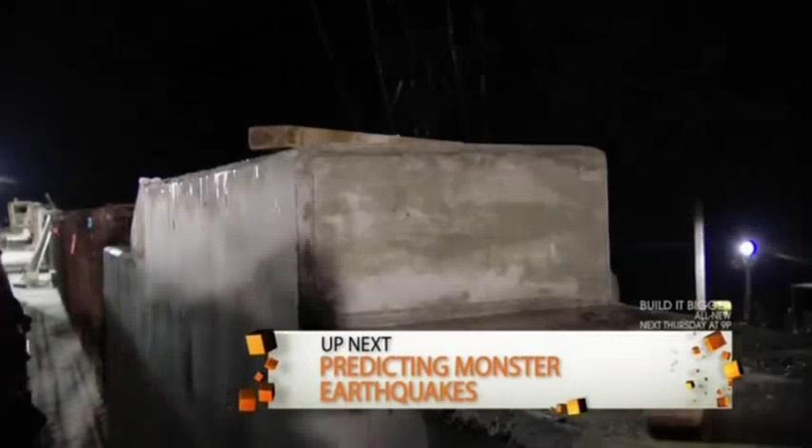The parapet wall is made up of 2-foot thick concrete poured each morning. To keep the daytime crew on schedule, the night shift has to remove and reset 2 of the massive 36-foot molds in just 6 hours.

So by day, they place the concrete. At night, we pull the forms. We set the forms. Next day, they come back, they pour the concrete. On and on, that's it. It's ongoing. Got a mile and a half of it to do.

We got to get busy, stay busy. Should we do it? Let's do it. Still not be up on top. On top? Let's go. All right.

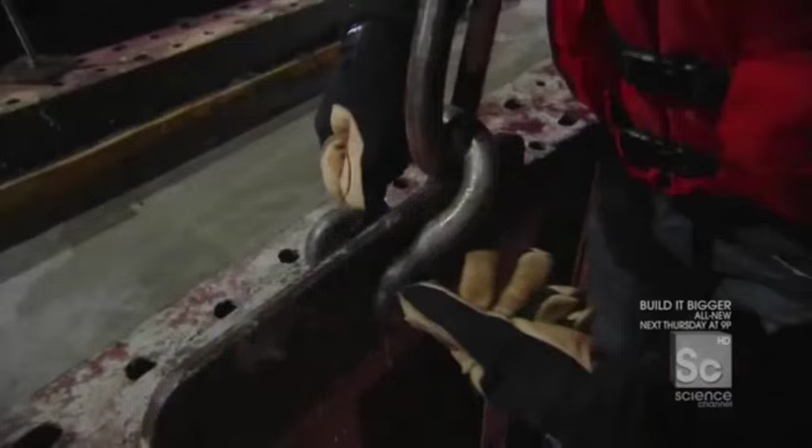The forms are 8 feet tall and weigh over 10 tons. To lift them, the crew needs the biggest crane on site, the mammoth 240-ton barge crane.

Rick's putting a little bit of tension in the line to look at the shackle, make sure it looks right, they're even, they're not pulling, they're not buckling. If he's happy, we're gonna get off it, start the lift. What do you think, Rick? It's holding good. Let's go ahead and get down.

All right. The formwork is ready to go. Crane has tension.

And as it comes up, what you'll get to see is the exposed parapet for the first time. So just as we've gotten this thing off, we revealed the finished concrete wall, cleaned it, not a moment too soon. We're gonna pop it back onto the rebar and begin the process all over again. It all starts over again.

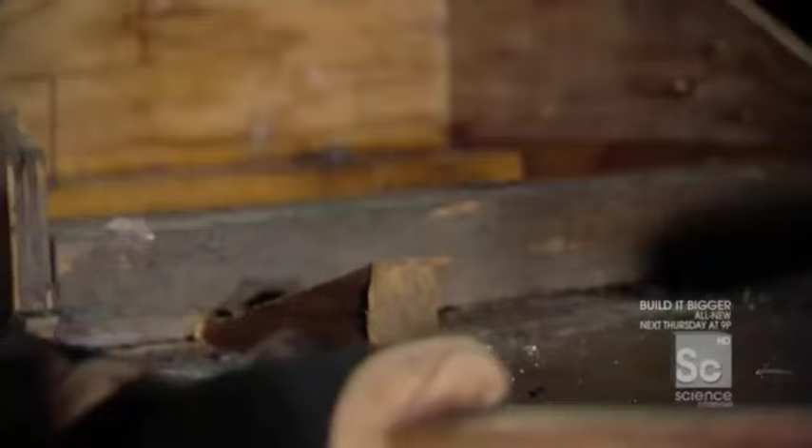There's no time to waste here, is there? You're holding up the show. Let's go. The most important step is to knock out the wooden blocks that form the parapet wall's wave-chopping notches.

A couple of smacks, pop it up, take the pry bar, pry it off. All the while do it such that we don't damage it so we can reuse it on the next form. You got it. I'm on it.

Who needs a pry bar? This way it's supposed to come off and stay intact. Look at that nice edge. So we'll pop a couple more of these off? Or they'll pop? Pop a couple more and we'll go check on the form, see if it's ready to go. I promise I won't break them. Take care of it.

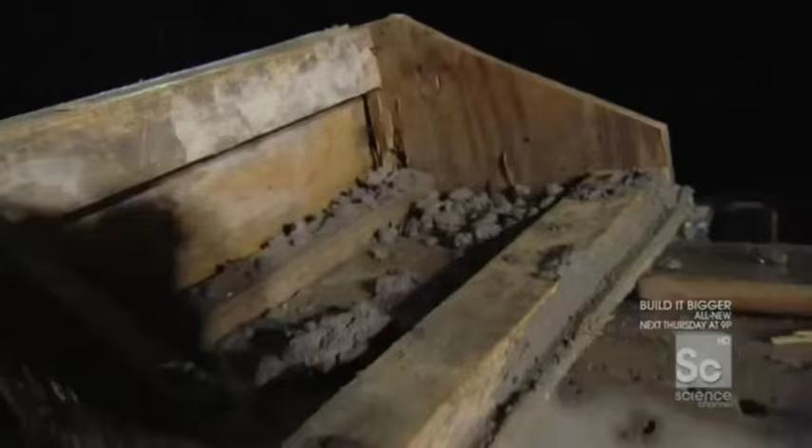Nice, smooth, 90-degree, notched out finish. With all 12 blocks removed, the wall is 36 feet closer to completion. Only a mile and a half to go.

Do you get that sense that after 5 years, New Orleans is beginning to get back on its feet? It's starting to get back. They ain't never gonna take it away from Louisiana. We've still got it. We're just putting it back together so we can enjoy it again. And this wall's a big piece of that. It's gonna be a big part of it. Makes you kind of proud of what we're doing.

Right now we got work to do. We need to get this done. Understood. In just 11 months, the surge barrier will be operational, giving the people of New Orleans hurricane protection they've never had, and the confidence to come home and rebuild in the city they love.

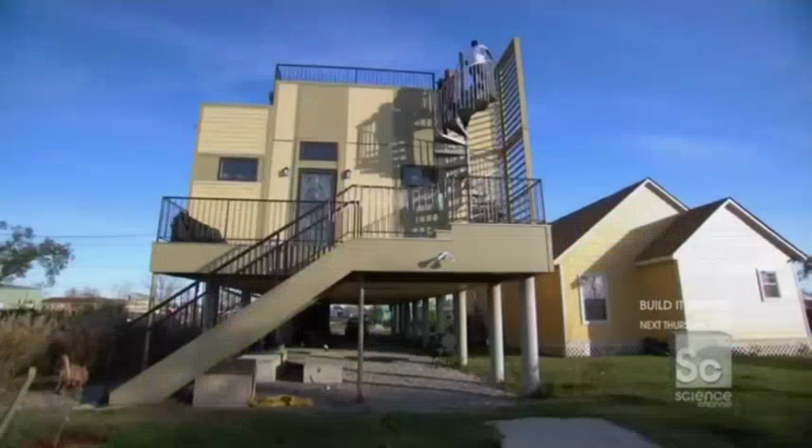See, this is my home away from home. And I just love looking at New Orleans. So, Miss Leggett, when someone who's not from here looks out and says, has New Orleans got a shot? Is it going to come back? I tell them yes. Good shot. Good shot.

Miss Leggett and more than 300,000 others have already returned to New Orleans to rebuild and transform their city. The recovery of New Orleans is a complicated issue. On the one hand, if you don't hold back the water, the city just won't survive. But beyond fortifying walls, it's also about building a community, a place people want to call home. It's part infrastructure, but it's also part dining room table.

And what I found in New Orleans is that they're actually doing both. 8 miles from here, the new surge barrier will hold back the next Katrina. Here in the Lower 9th Ward, one of the worst hit areas, you're seeing more than just signs of recovery, you're seeing a full-blown redevelopment. The Make It Right houses are taking what they learned from the tragedy and transforming it into innovation. And that, in the end, is what real recovery is: taking the existing culture of New Orleans and transforming it into something new.